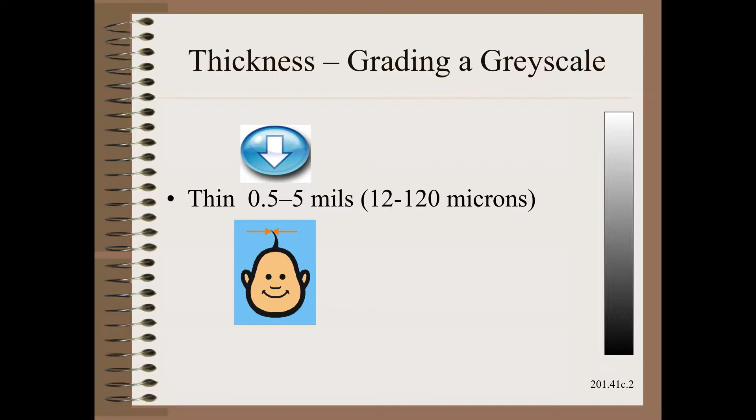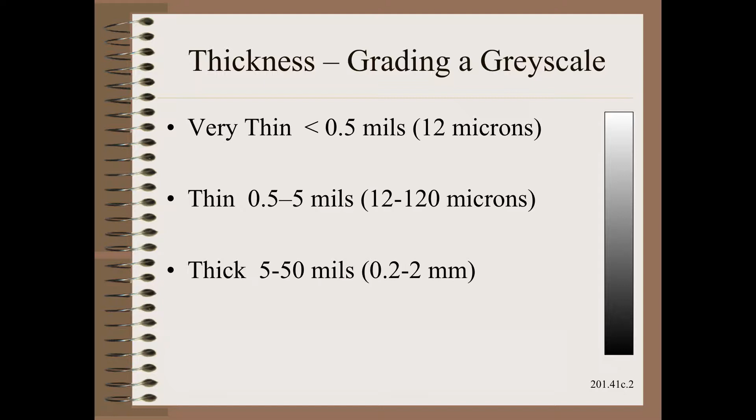Of course, there are thinner and thicker webs, but they are a little less common in terms of commercial production. While commercially produced webs do not get much thinner than the ranges shown here, they could get much thicker. However, we then enter a new set of behaviors that is not considered by web handling. That is, the whole new range of out-of-plane bending stresses that can no longer be ignored. We are no longer in the comfortable confines defined by web handlers decades ago, where the web is long, thin, and flexible. These would be the concerns of sheets, not webs.

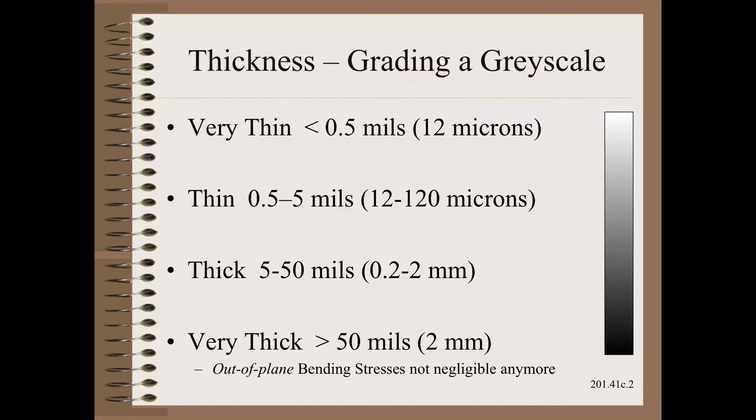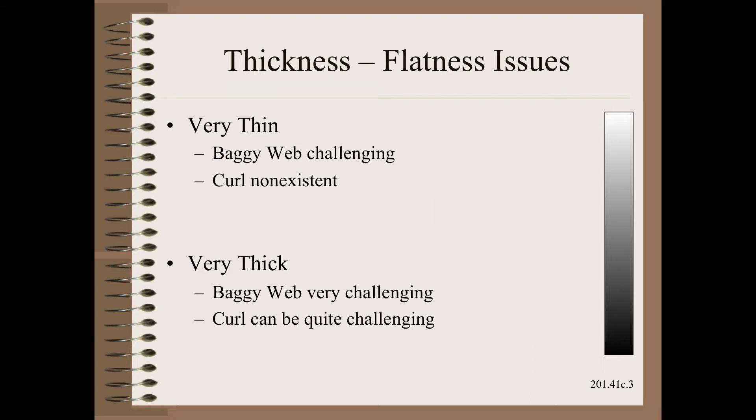By far, the biggest area of concern with regard to thickness is its effect on various flatness concerns. Baggy webs can be challenging at any thickness, but perhaps a bit more as the thickness increases. The bigger effect is seen with curl, that is nearly non-existent on thin webs, but could be quite challenging with thick webs. Another area of big difference is the entire world of wrinkling and wrinkling treatment by spreading.

While wrinkling is the #1 cause of waste and delay with thin webs, it is, for all practical purposes, non-existent with thick webs. Thus, it is good that we have so many spreading treatment options for thin webs. We need it. It is also fine for us that while we can't spread very thick webs, it is neither helpful nor needed anyway.

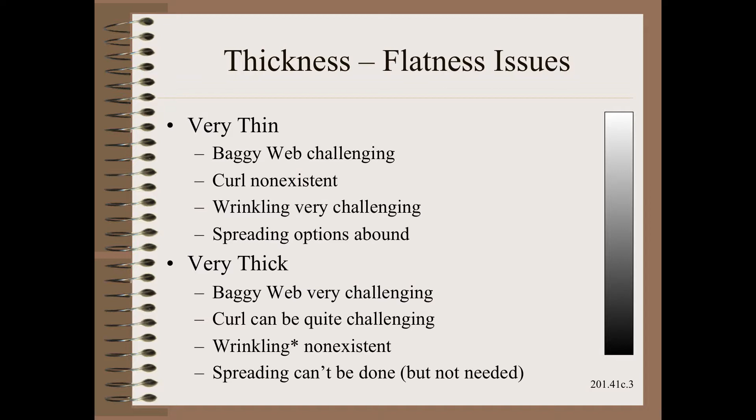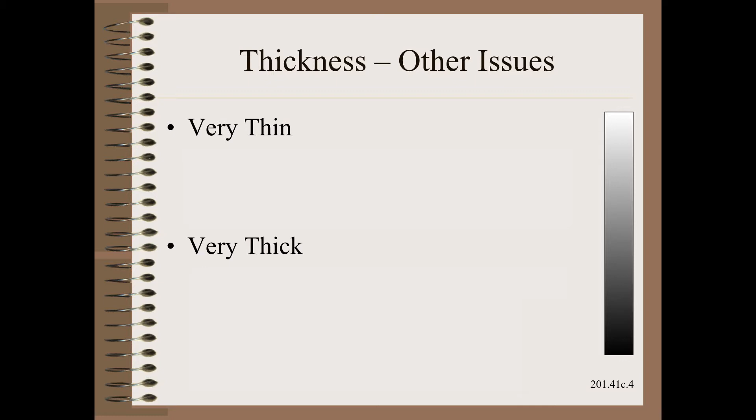Thickness has a very large effect on a couple of other web handling and a couple of other web converting issues. Air entrainment can be very challenging when webs are simultaneously thin, not narrow, smooth, and run at high speeds. We discovered that topic in the first clip in this series.

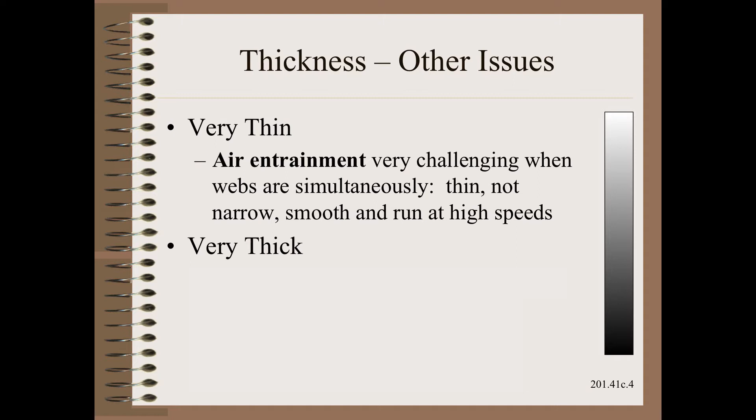On the other hand, bend radius can be a concern with very thick webs. This might require larger cores for winding and larger rollers for web handling. Finally, several converting challenges can get much worse with very thick webs, including cutting, guiding, and splicing.